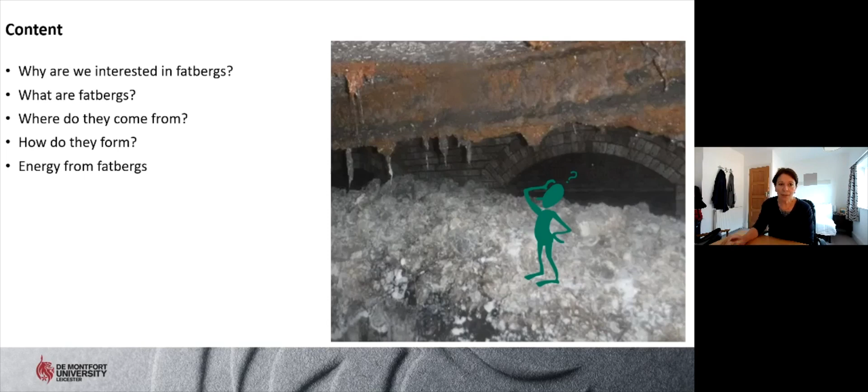So why are we interested in fatberg? Well, they are a nuisance. Obviously, there's a lot of sewer blockages caused by fatbergs. Fatberg is a new word. It was created in about 2017, when we had the big blockage in London. Before that, we referred to this material as FOG, fat, oil, and grease. Over the ocean in America, they call them FROG, fat, roots, oil, and grease, because they have a lot of concrete sewers, and roots are one part of the problem, because the roots act as a filter, and fat attaches very easily to this material.

So FOG and fatberg have been around for a while. They're mainly due to our change in diet, the fact that we eat out a lot. There's a lot of cooking, our eating style has changed, and we're eating fattier food. So they are a problem because this material is now discharging to the sewers. There's a lot of blockages, pumping station failure, sewer overflows, water pollution. There's also a kind of unquantifiable impact on the treatment plant. Some of the research suggests about 10% of additional cost because of this material. You can see the image of the poor guy shoveling the material out of the sewers; it's quite an unpleasant thing to deal with. It costs a lot of money, and they are the cause of the majority of the blockages in the UK.

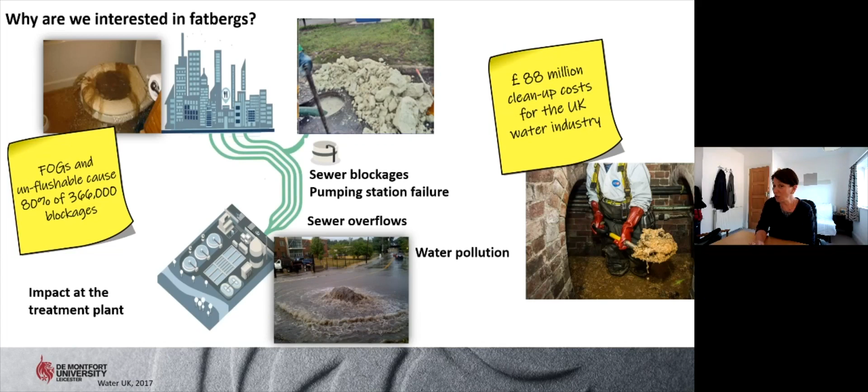As I said, I think in the US, the problem started. Have I lost? Am I still sharing? Yes. Okay, sorry.

So over the ocean, they started worrying about the problem a little bit earlier than us. When we started working on fat, oil and grease, it was 2008, 2009. America was a little bit ahead of us. They have quite big fatbergs as well, 140 ton, 190 ton in Detroit. Obviously, the first one was London. I think the most recent one was Liverpool. Sidmouth was quite a big one. We had one in Birmingham recently. And Singapore had a lot of problems with blockages linked to fat, and Australia. In Europe as well, but there's a bit of a difference in the way that the sewer is managed, and combined sewers seem to be an important factor.

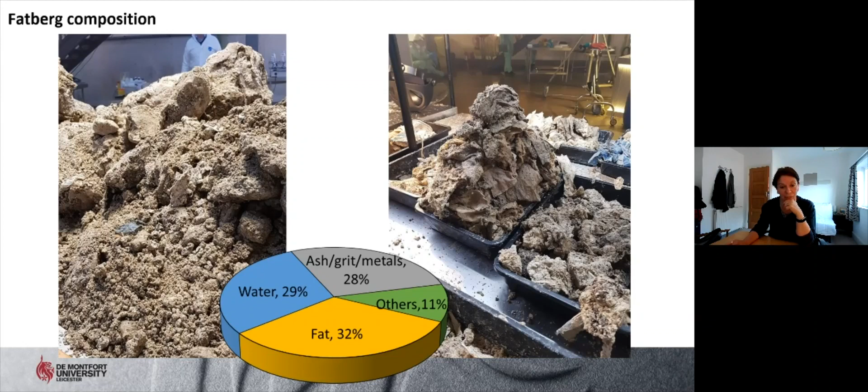But where does this oil come from? Well, as I said, mainly from our cooking activities, and we're not talking about used cooking oil, which is what most people think about when we talk about fatbergs. It's not the oil that is recovered from fryers that can be turned into nice clean biodiesel. It's more oil that comes from the cleaning process. So the cleaning of pans, cleaning of plates, the canopies, the extractors in the kitchen. So I'm talking mainly about restaurant kitchens, but also household kitchens.

So the roast dinner, fat poured on the drain, or the pan where you fried your steaks, cleaned in the sink, and all this material accumulates gradually. So it's not cooked oil; it's something slightly different. But there's also, sorry, this was supposed to be an animation.

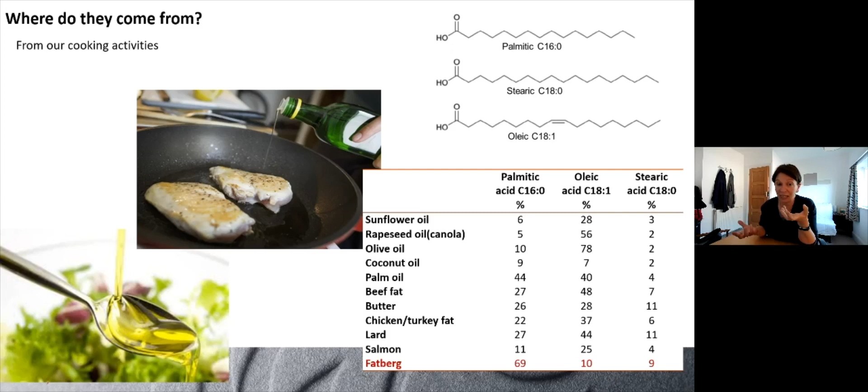So the main acid present in the fatberg is palmitic, which is a C16. But if you look at the composition of the most used cooking oil in the UK, sunflower oil, palmitic is not very high. Palmitic is mainly found in animal fat, but still that composition is very skewed. And this can be due to a lot of things. It could be a degradation of the acid, but my suggestion is that part of it comes also from our personal care products, because very similar acids are used in personal care products. And I'll explain to you in a minute how and why.

Obviously, if you look at the fatty acid salts used in personal care products, the amount is much, much lower. We are talking about at least 10 times less than the fat used in cooking. So again, I'm not blaming the personal care industry, but I'm just suggesting that there is also that component.

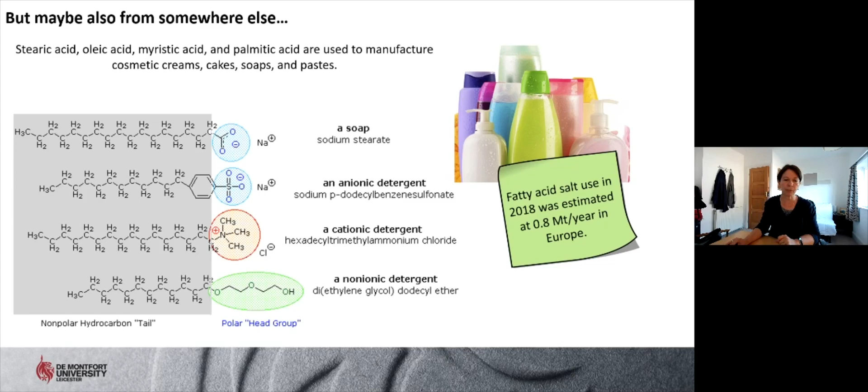So how does the fatberg form? And this is quite important because this is a very, very hard material. I don't know if you've ever seen it, you can Google the video how to clean the fatberg. But the poor people that have to clean the fatberg, well, usually they jet the sewers, and some of it is actually hand removed, so people have to go down and remove this material. It's actually really hard material.

So how do we go from the soft material that is the fat that we cook with, to that fatberg that is hard and difficult to remove? This is something that we are still working on, because it's not completely clear, but we know that there are different reactions involved in the process. There's a triggering reaction, which is what caused the initial precipitation and initial attachment of this material onto the sewers. And then a kind of maturation process where the fat becomes hard and is difficult to remove. And we have identified 5 reactions, and I'll take you through the reactions as we go along.

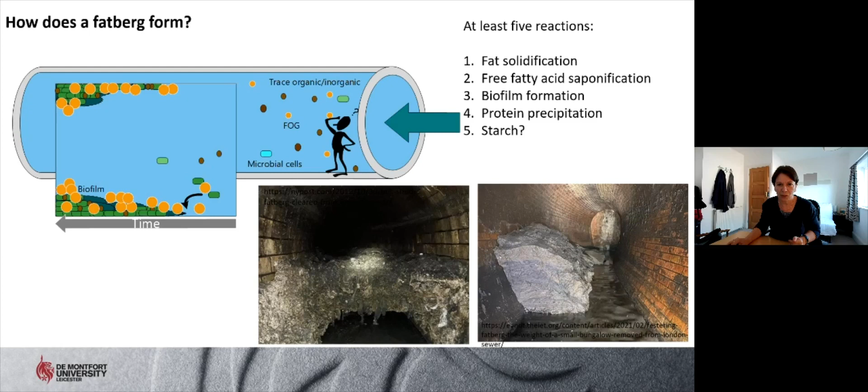So first of all, there's a standard fat solidification. When we cook a steak, if you leave the residue in the pan, the fat becomes solid, and that's what happens in the sewers as well. It actually happens in our veins as well if we eat too much fat. So it is a common problem elsewhere.

So there's solidification, but there's also what we call saponification. If you think about the old way of soap making, the one that our ancestors used was fat, ash, which is our kind of catalyst, and heat. I don't know if I can use my, oh yes I can, laser pointer here. This material here is a fatberg from Whitechapel. This is the material that I analyzed, and this is dried fatberg. We just put it into the dryer, and it always fascinates me how similar it is to soap, and we're not the only ones that found that link.

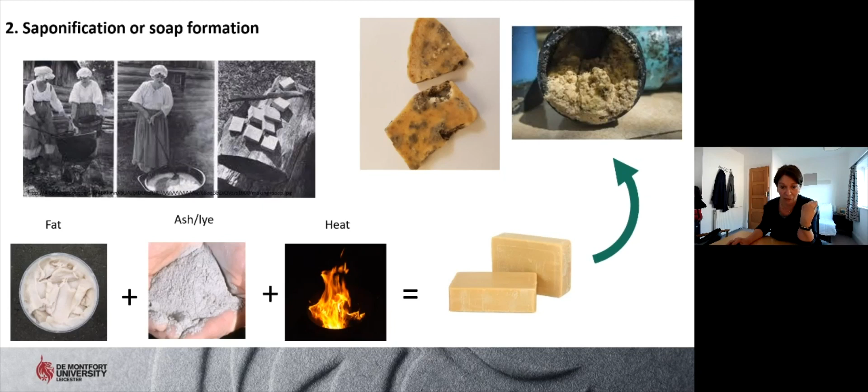And if I think back at that comment that I made to you about personal care products, when you have a traditional bath with a traditional soap, if you live in a hard water area, you get that kind of scum. I think it's called scum, but it's just the soap going from a soluble salt, which is the sodium salt, to an insoluble salt, which is a calcium salt. And something similar might happen also in the sewers. So if you look at that material, it's quite soap-like.

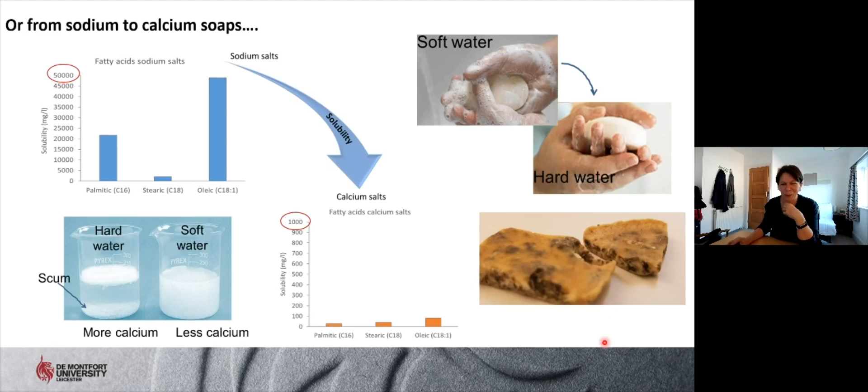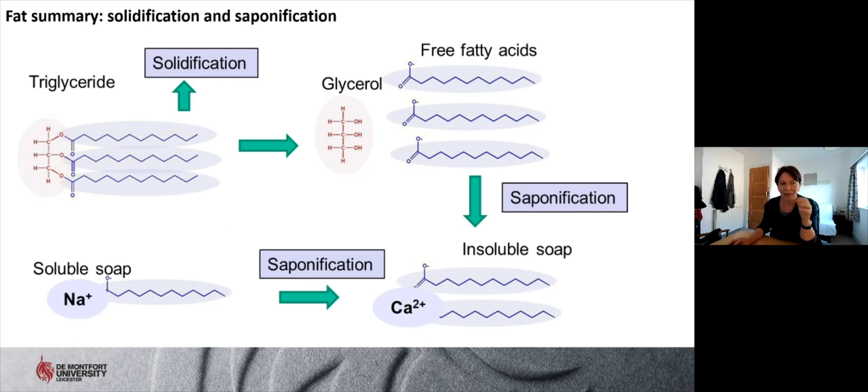So fats are a big issue, and they are the major component of this material, through different processes: solidification, saponification, but also that maturation process whereby the solidified fat, which is soft, becomes hard. But there's also other things. There's bacteria in there. There's biofilm growing on the surface inside the fatberg. This is a biofilm on a pipe of clean water. Can you imagine what kind of biofilm grows in a sewer? There's a lot of bacteria thriving on that, and they can cement that material.

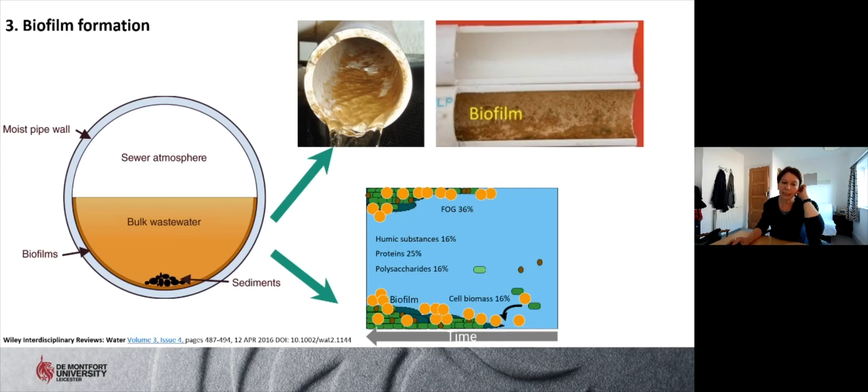There's also protein precipitation, and this is an epiphany, let's call it, that I had one day. I was in London for a fatberg meeting, and I stopped for a coffee. And I realized that every time someone has a cappuccino or a latte, which is the majority of people in the UK, the person that prepared it rinses the jug and pours the milk down the drain, and that milk is rich in protein and fat. If you think of what happens to your milk when it goes sour, or when people make cheese, you've got that salting out of the protein. The protein comes out of solution and precipitates and brings all the fat with it.

And I thought that's something that could happen also in the sewers, because we analyzed the effluent of the kitchens, and kitchen discharge can be at pH as high as 11 when it comes out, for example, from a dishwasher. So that could happen as well. That could also be a triggering factor. And then there's also starch, which is very sticky material, and it could also be implicated. So why does it form and how does it form?

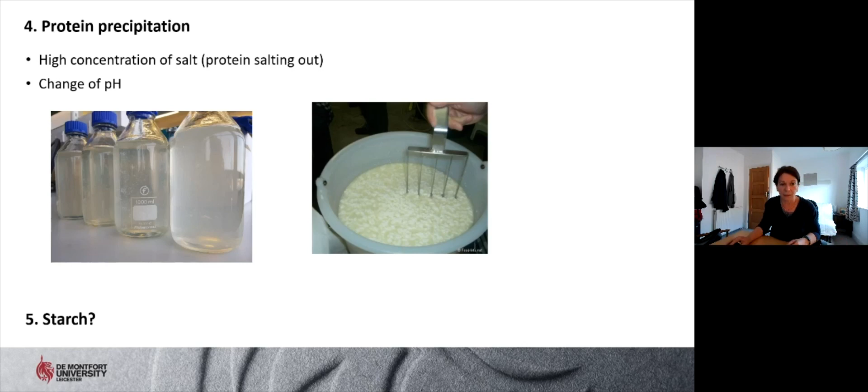We're still not fully clear. And why is it important? Well, it is important because unless we understand how it forms, it's really difficult to bioremediate or remediate the process. So we do need to understand the process. And of course, as I said, there's a lot of wipes that helps keep everything together, which is not very nice.

So how do we, first of all, manage it? It seems quite out of scope for this presentation, but actually managing links a lot to the energy recovery. So first of all, best kitchen management practice. Try to avoid pouring things down the drain, etc. So if possible, the cooking oil, the fat left over from a roast chicken, should be collected separately.

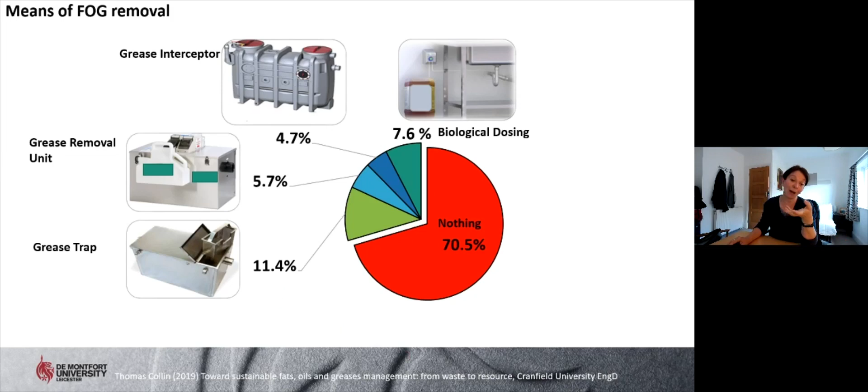So what can we do with this material? How do we get value out of it? In the past it was a very valuable material because of the glycerol. Cooking fat is made mainly of triglycerides, which are a glycerol backbone with 3 long-chain fatty acids attached to it. So during the war, there was a campaign, mainly in America, to recover the fat for the glycerol. So that's one value. But obviously, as I said, there's a lot of energy in it. So where I'm going now is: where do we get the energy from?

This study comes from an EngD with Thames Water. We looked at the potential of recovering energy at catchment level. Thames Water, having one of the first fatberg problems, decided to look at the problem in a more holistic way and say, okay, we've got this problem. Can we recover the material? And if we can, can we get energy out of it? And so the students looked at different outcomes.

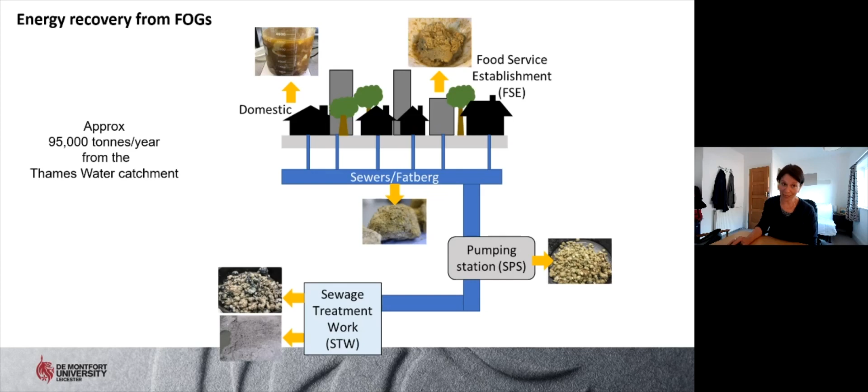If you remember, my initial number was 59,000 tons per year. From this study, we came up with a number of 95,000 tons per year from the Thames Water catchment. Thames Water is a big catchment, but as I said, my number was a massive underestimation. So much more of the material is basically wasted. What we did next was use this material to look for energy. Yeah, I'm finally arriving at the energy part. And guess what?

We should have thought about that. We did know about that, but the further you move from the source, the less the energy content is of that material. And it's a logical thing: we are putting material through sewers. We have combined sewers, so it's diluted, it's contaminated, it changes its nature.

So the less water, more heat, and the further from source, less energy content. So not only is it important to remove at source because we are eliminating the problem of blockages, or the potential problem of blockages, but it's also quite important because we recover more energy.

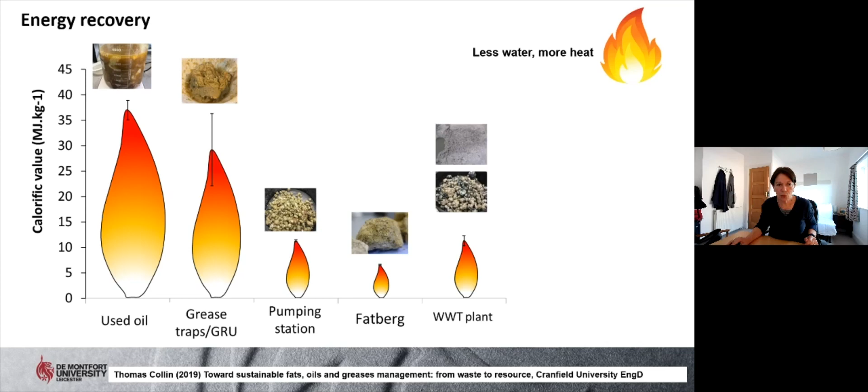And this is the energy recovering from restaurants. So Thames Water agreed with some restaurants in their catchment to set up some grease recovery units, so they could recover the grease separator. I can't remember which ones they were. It's a minefield. The companies that make them are quite attentive to the nomenclature, but it was a mixture of types of grease recovery unit.

And so they recovered material from the restaurants for about a year, and then we added that material to the biogas. We've done some work also on biodiesel, but the problem of this material and biodiesel is that it is a very contaminated material. As I said, in grease traps there's a lot of solids. Also on oil recovery at household level, there was a lot of solid material, and because it's usually left there for several weeks, there's a high percentage of free fatty acid.

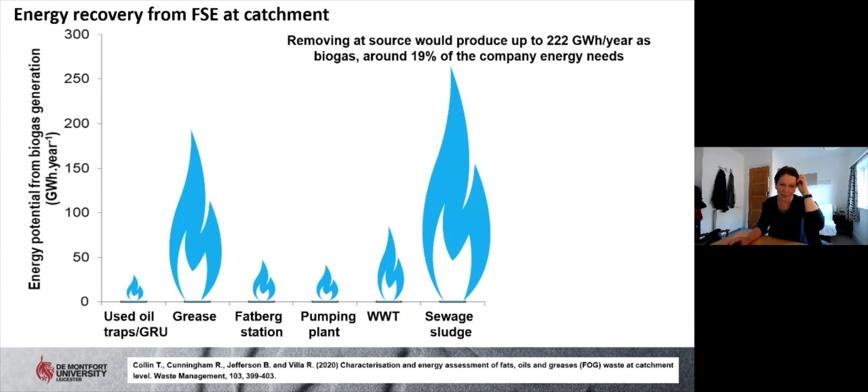And of course, there's a lot of calculation that has gone into the thesis of the student, because there's obviously a balance between the cost of recovering this material, transporting the material, and the energy recovered. So that's up to Thames Water now to decide what to do.

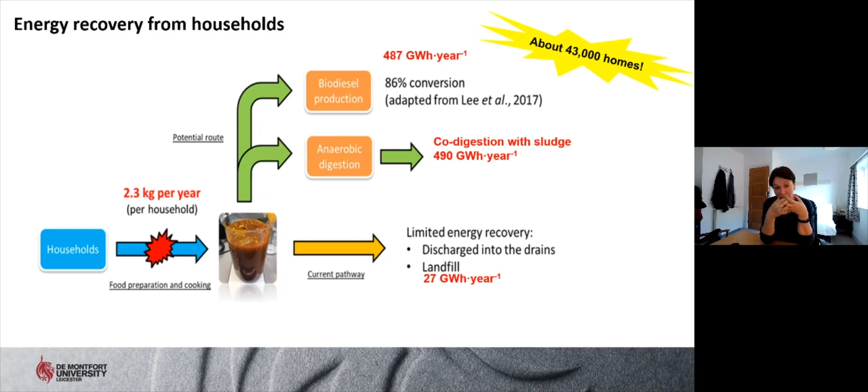So almost at the end, an easy take-home message: at source is cleaner material, and down the sewers as a fatberg is more contamination, less energy, not worth doing it. So energy from fatberg, yes, in the sense that if we can get it before it becomes a fatberg.